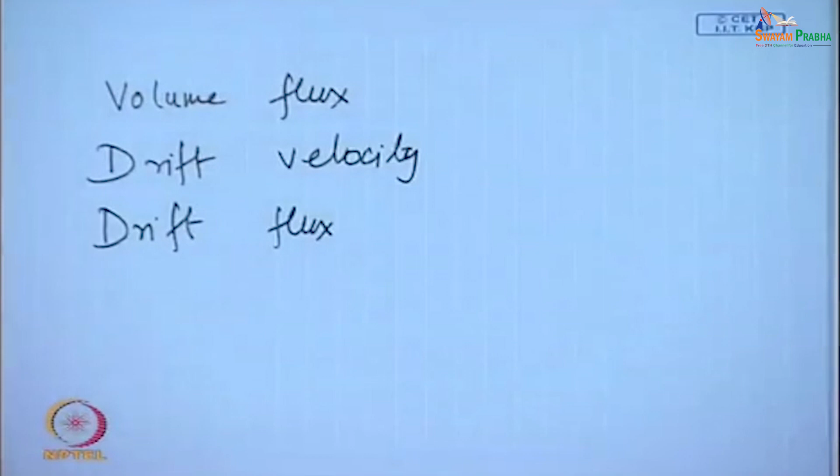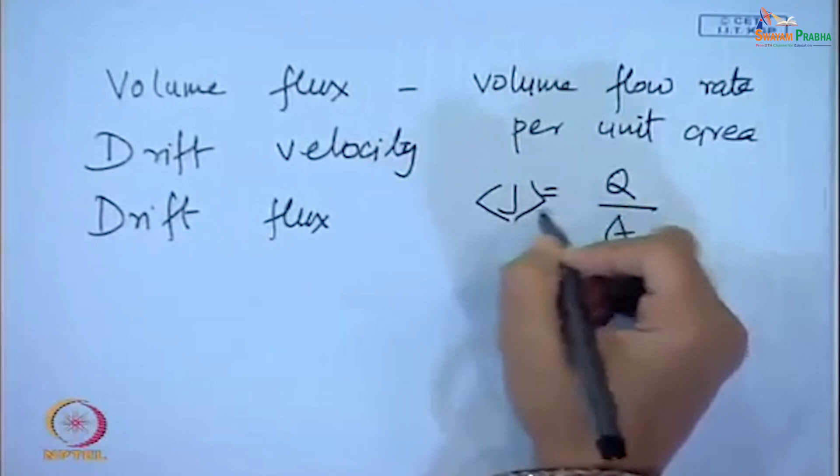Now as far as the volume flux is concerned, as we have already defined, it is simply the volume flow rate per unit area. This I have already told you, and this is J equals to Q by A. Usually it is the average J that we find, and for two phase flow situations...

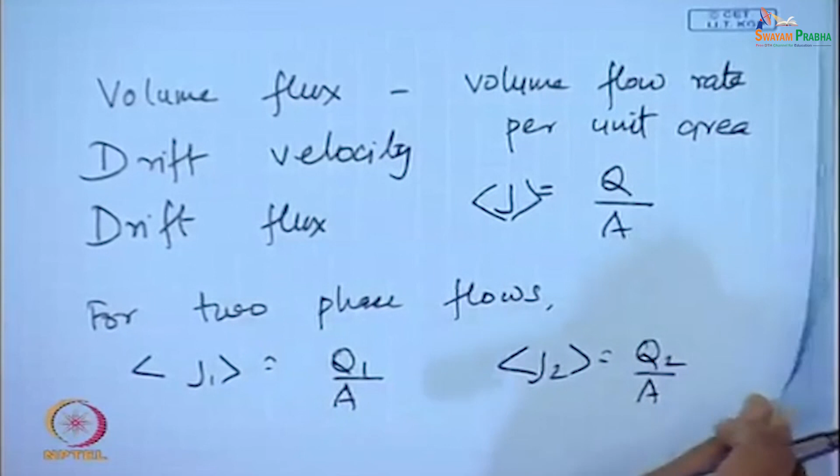Naturally for everything we have to give certain subscripts. So it is J1 which is equal to Q1 by A, J2 equals to Q2 by A. Now all these things denote the average volumetric flux. When there is no variation across the cross section, then naturally the local flux and the average flux are the same.

So under normal circumstances we are not going to put these brackets every time. It is implied that we are speaking about the average fluxes, and since we will be dealing mostly with one dimensional flow situations, our local fluxes and average fluxes are going to be the same thing. Whenever we put those brackets, just like in single phase flow situations, they usually denote the cross sectional average values, and usually we omit them.

And there are certain other things. For example, how are these component fluxes related to the local component concentration as well as the local velocity? That means local component concentration, alpha, and local velocity, u. How are J1, J2 related to alpha and u1, u2?

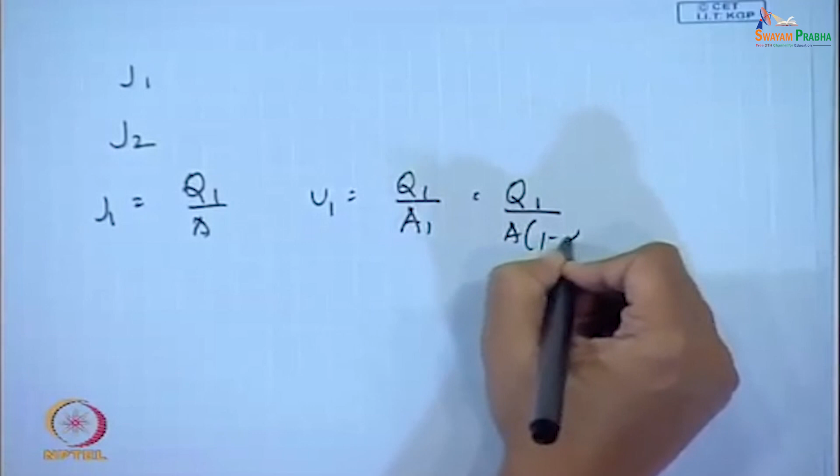So therefore, just from the definition you can know that since J1 is nothing but Q1 by A, and u1 is nothing but Q1 by A1, which is in other words Q1 by A into 1 minus alpha. So from here we know very well that J1 is nothing but 1 minus alpha into u1, and J2 is alpha into u2.

And how are they related to beta instead of alpha? Any idea how it is related to beta? Please come prepared with the nomenclatures, otherwise it is going to be difficult. It is J into 1 minus beta, and this is equal to J beta, isn't it? It is just the inlet flux.

Or in other words, suppose I would like to relate the mass flux and the volume flux. So how are these two related? We know this is nothing but equal to G into 1 minus x by rho 1, because Q1 is nothing but W1 by rho 1, which is nothing but G1 A by rho 1, or in other words G into 1 minus x by rho 1. And therefore J1 is nothing but Q1 by A, so this is going to be G into 1 minus x by rho 1.

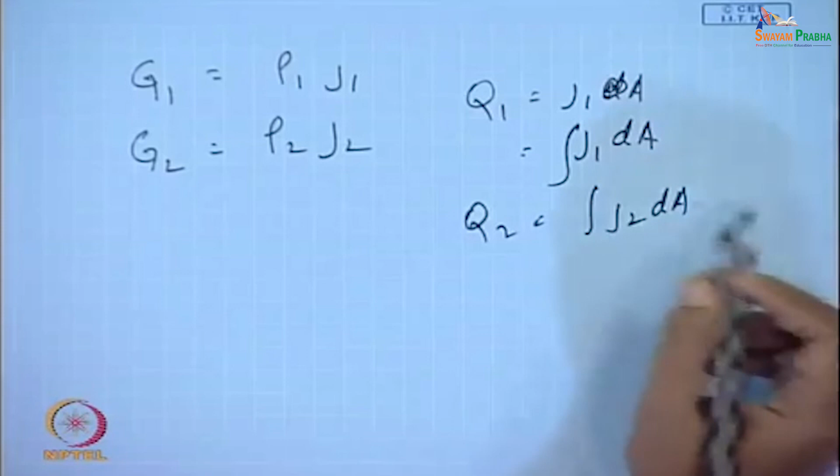into A, but the accurate expression is going to be something of this sort when there is a cross sectional variation of the void fraction, for Q2. Naturally, in the same way we can write it in this particular manner. When J1, J2 vary across the cross section, we can write it in this particular way. So these are the relationships which relate your component mass fluxes and the component volumetric fluxes.

Whenever you are given any particular derivation, please start from the basic definitions and then start deriving. It is going to be easier for you. And as far as I am concerned, if you just start midway and then do something, some marks will be deducted. That you keep in mind.

So, in the similar way, suppose we would like to relate J1 by J2 with the slip ratio or the slip velocity, whatever it is. So this is nothing but equal to Q1 by Q2, agreed, and this is again nothing but Q1, as I have already written down here. Here I have written down Q1, it can be

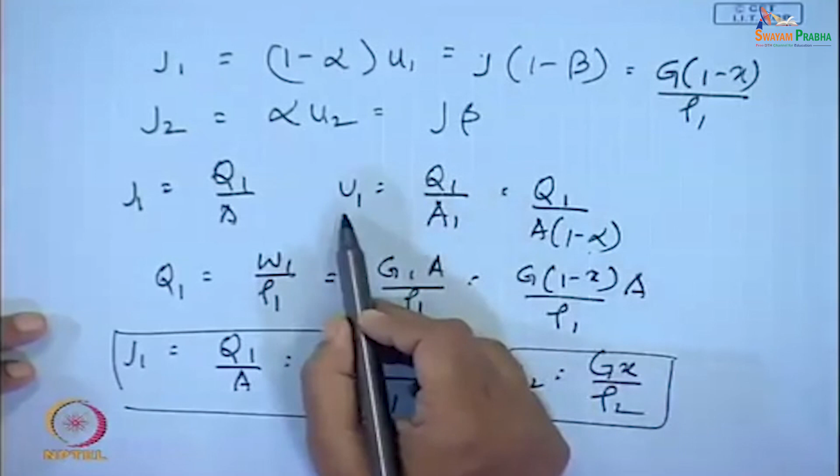written down as A into 1 minus alpha into U1. So if we write it down in this particular manner and we substitute it, then we know that this is equal to U1 by U2 into 1 minus alpha by alpha, is it not? So therefore, in this particular way, or in other words, this is simply K into 1 minus alpha by alpha, where K is the slip ratio.

Why we are trying to connect all these things? Because this is a measurable parameter. So therefore, if we can connect, then if data are available on alpha, we can find out K, or vice versa. Now this was about the volume flux.

Volume flux also probably you have heard. Two other terms, they come up just because of the different velocities the two phases have. Now these two are the drift velocity and the drift flux. Now the drift velocity, if you take it up, it is nothing but equal to the component velocity minus the average velocity.

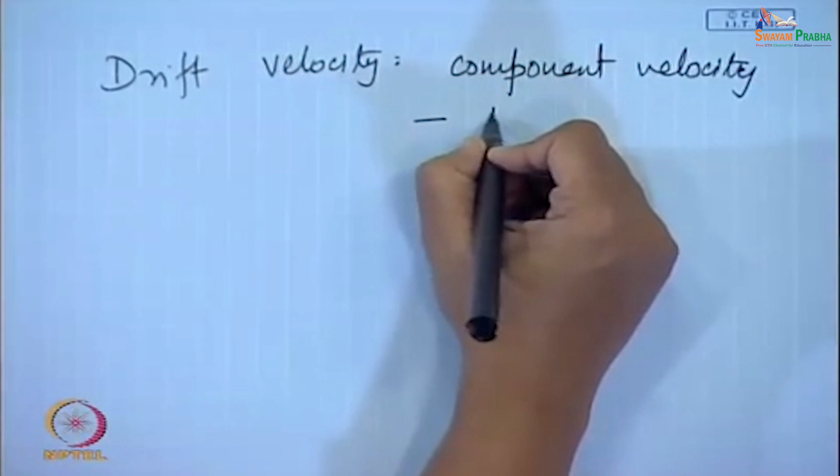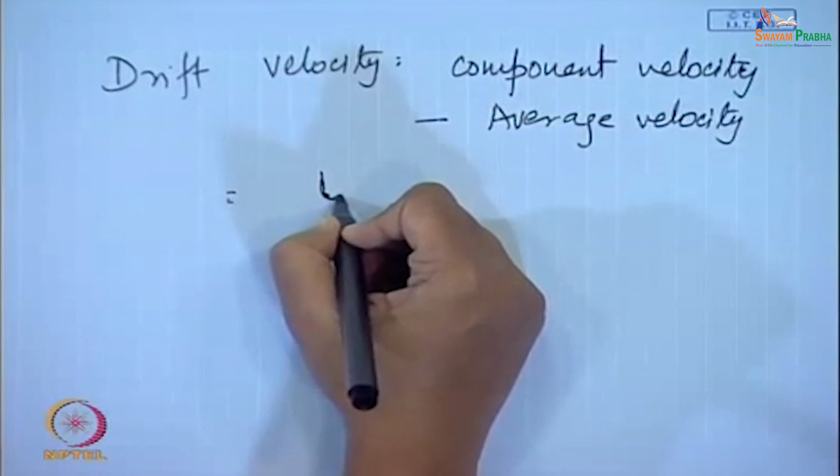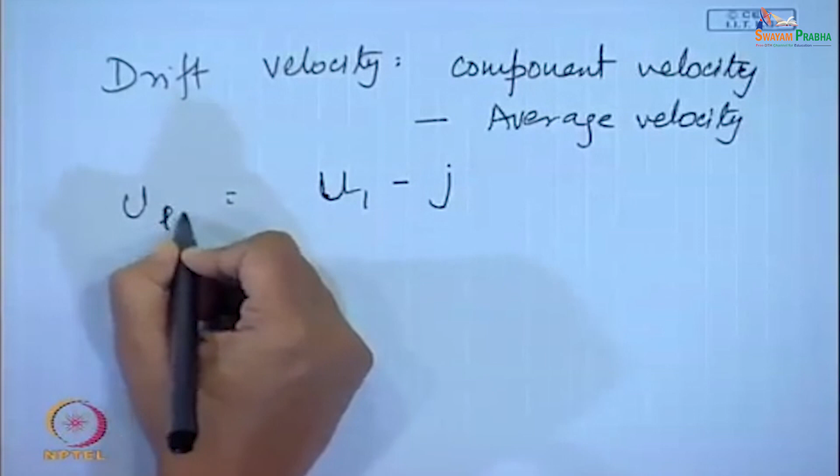So what is the component velocity? How do we denote the component velocity? What is the nomenclature that I have used for the component velocity? u1, and the average is nothing but equal to j. So the drift velocity, it can be defined as u1j, this is equal to u1 minus j, u2j, this is equal to u2 minus j.

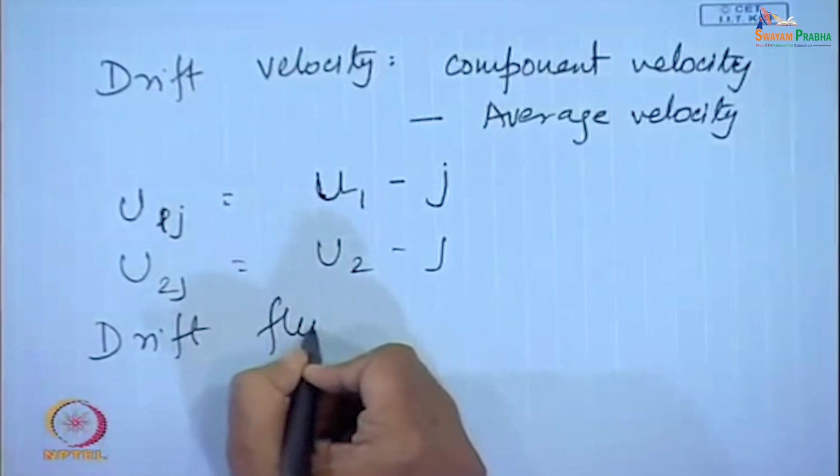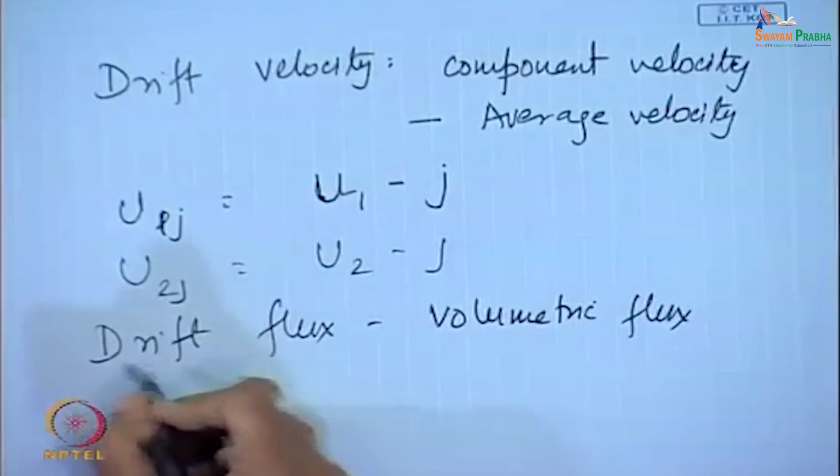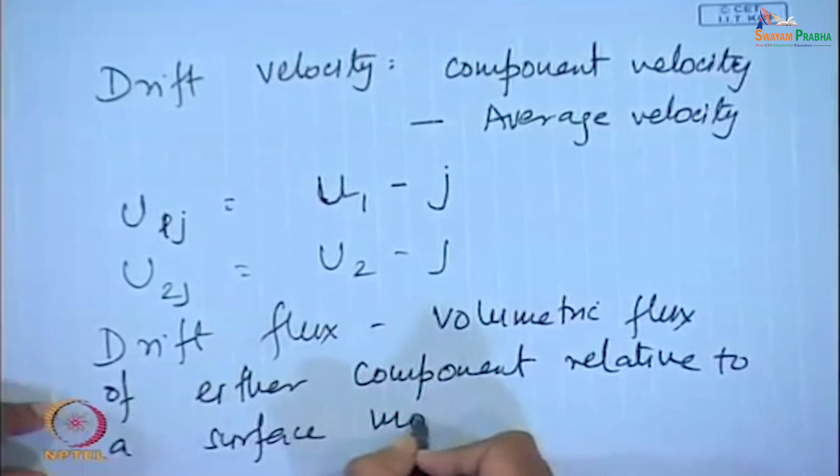Now next comes the drift flux. Now the definition of drift flux, this is the volumetric flux of either component. These definitions you will get in Wallis or Collier, any particular book, you are going to get these definitions. Volumetric flux of either component relative to a surface moving at volumetric average velocity. This is the actual definition.

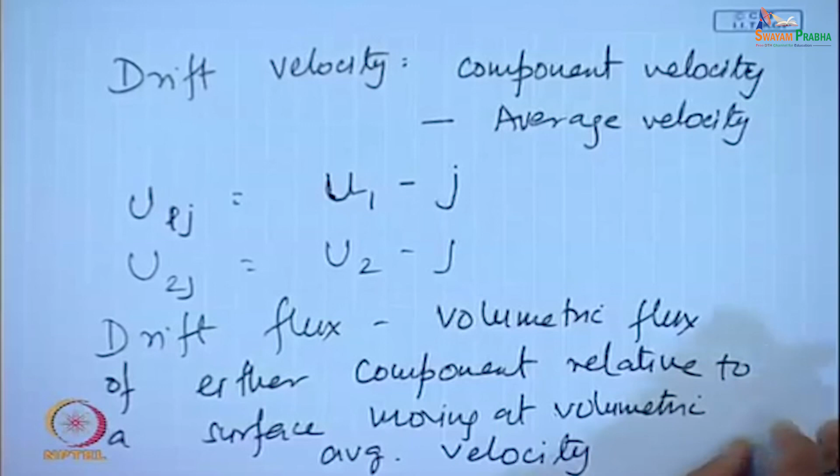So mathematically how we can define this? This can be defined, is usually taken as J21, and this is, as I have told you, volumetric flux of either of the component. What is the volumetric flux of either of the component? Say it is alpha into u2 minus alpha into j. So therefore it is alpha into u2 minus j. This is J21, and J12 equals to 1 minus alpha into u1 minus j.

So these three are the definitions which I wanted to say. Volume flux I have already told you, and after that it is the drift velocity, which is nothing but the component velocity minus the average velocity, and then is the drift flux, which we have defined as the volumetric flux of either component relative to a surface moving at the average velocity. Now remember one thing, this drift flux is very important. In fact, we will be developing a drift flux model using this particular concept.

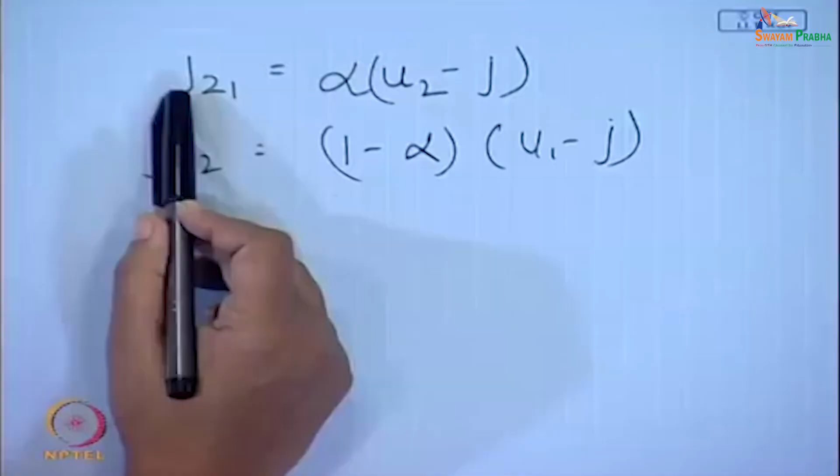Okay, so therefore it is quite important. This drift flux arises just because the two fluids are flowing at different velocities. All these relative things - the slip ratio, the relative velocity, the drift flux, the drift velocity - everything arises just because the two phases are at different velocities. So we would like to derive expressions relating the drift flux and the relative velocity, and also see what is the relationship between J21 and J12.

Why? Because for relative velocity we know u21 equals minus u12. Similarly, what is the relationship between these two? And how is J21 related, because J21 arises as a result of relative velocity. So how is J21 related to u21? This is what we would like to find out. Let us start from the basic definition and see how we can do it.

J21, as I have already defined, is alpha into u2 minus j. We can write it down as alpha u2 minus alpha j. This j is nothing but j1 plus j2. So this can be written as alpha u2 minus alpha j1 minus alpha j2, or in other words, minus alpha j, where j is j1 plus j2, accordingly written in this fashion.

This can be written down, in other words, with alpha u2 as alpha into j2 by alpha, minus alpha j1 minus alpha j2. So therefore we can write it down - let me repeat the expression once more - J21 was equal to j2 minus alpha j1 minus alpha j2, or in other words, this is j2 into 1 minus alpha, minus alpha j1. This is the relationship between the drift flux and the component volumetric fluxes.

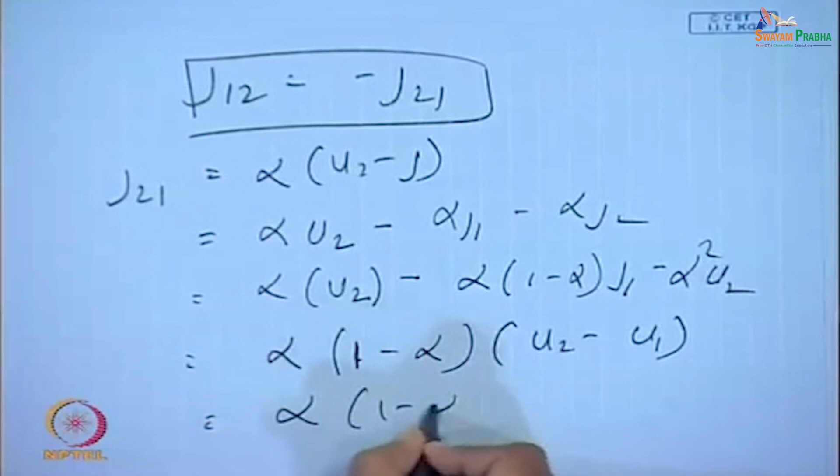So for this case, we can write it down as alpha u2 minus alpha j1, same thing that we had done previously. Or in other words, this can be written as alpha u2, expressing j1 in terms of alpha, it is alpha into 1 minus alpha j1 minus alpha square u2. Or in other words, we can write it as alpha into 1 minus alpha, u2 minus u1. Or in other words, we can write it down as alpha into 1 minus alpha, u21.

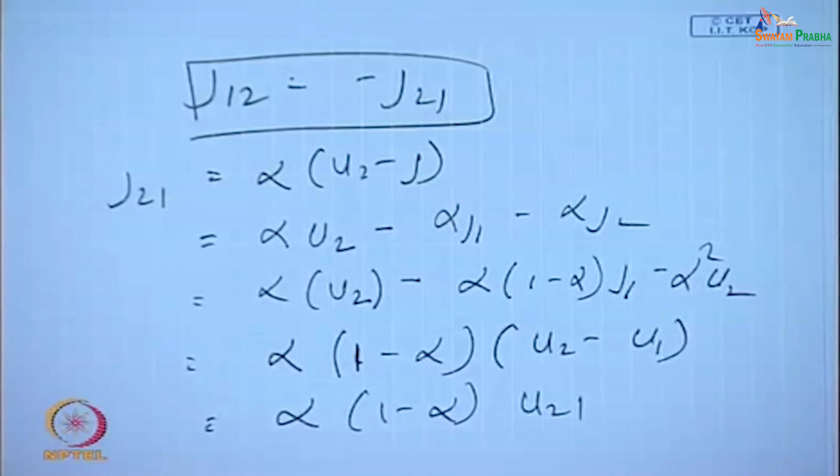Understood? Where u21 is nothing but the relative velocity of phase 2 with respect to phase 1. So from this particular expression, what do we get? We get j21 is proportional to u21, or in words, drift flux is proportional to relative velocity for a particular system under a particular condition, assuming alpha to be constant. So this is proportional to relative velocity.

So this thing has to be kept in mind. Drift flux, drift velocity we will be dealing with in greater detail when we do the drift flux model, but this completes the chapter of nomenclature. We had defined the set of nomenclatures. I would request you to revise the entire thing before we proceed further.

Initially, I tried to explain to you what is two phase flow, why you have opted for this subject, and why you should study it. Next, we found that the basic difference between single phase and two phase flow arises because the two phases have a wide variety of distributions. So unless we understand the distributions, we cannot do much about it.

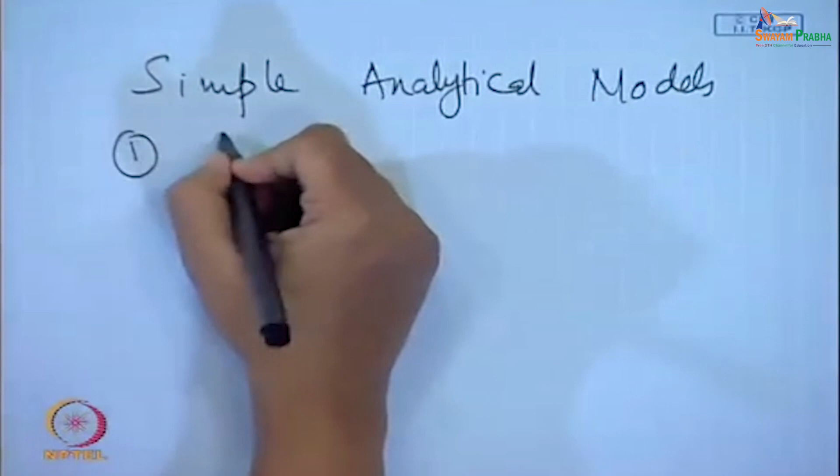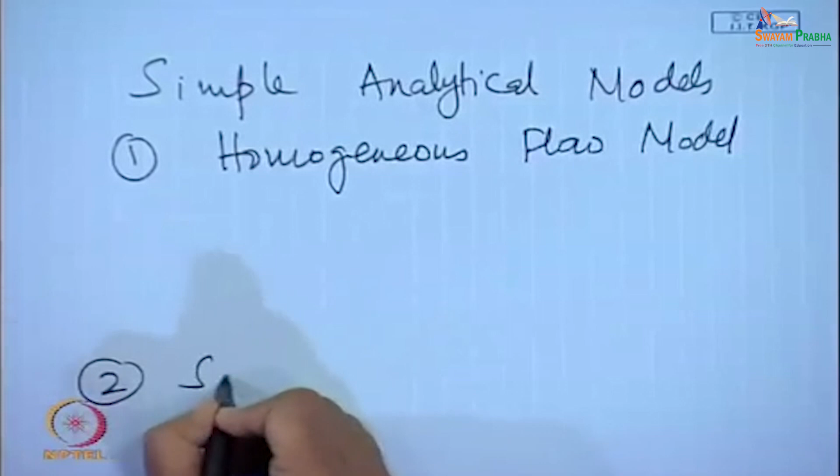Under the simple analytical models, there are different distributions we can assume: the two phases intimately mixed, or totally separated, interacting just at the interface. These are the two extremes that we can assume. Accordingly, the simple analytical models include, one, the homogeneous flow model, and the other extreme, the separated flow model.

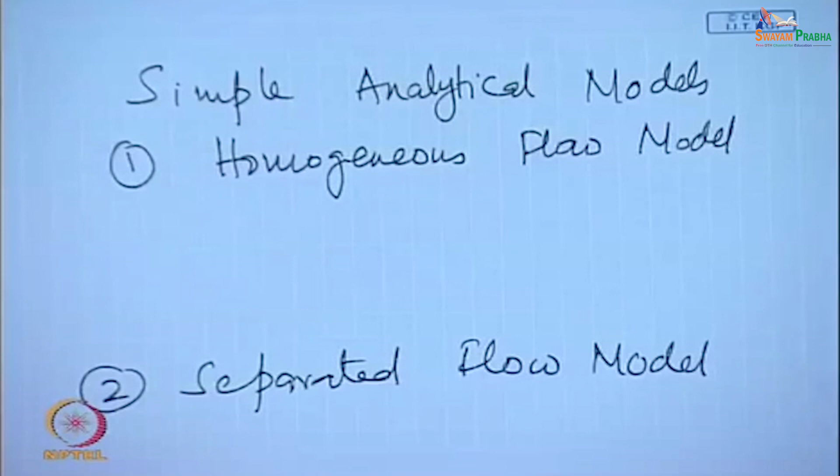In the homogeneous flow model, we assume that the components are intimately mixed, so that none of them can manifest their properties separately, and therefore the entire hydrodynamics can be predicted by suitable average properties. Under certain circumstances this can be very accurate. We will be dealing with these simple analytical models in much greater detail, and you can well understand that when it is a completely dispersed flow, the homogeneous flow model can give accurate results.

Unless we have very high phase velocities, or at least one phase has a very high velocity, there will always be a slip comparable to the mixture velocity. The first assumption when we say the two phases flow as a pseudo fluid is that they flow at the same velocity. The moment velocities become different, they start manifesting individual characteristics. But under practical applications, this happens under very few circumstances; for most cases there has to be relative motion between the two phases. So to improve the predictions of the homogeneous flow model, we have to incorporate the effect of relative velocity and modify its expressions.

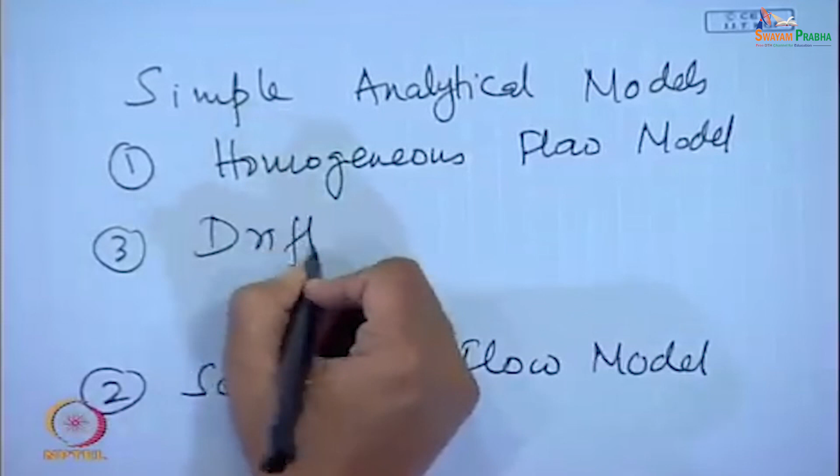Now, for that, what can we do? We incorporate the effect of relative motion by the concept of drift flux. Therefore, the improvement of the homogeneous flow model is the drift flux model, which incorporates the relative motion between the two phases. This is usually achieved by introducing the concept of drift flux, which we will discuss separately in greater detail.

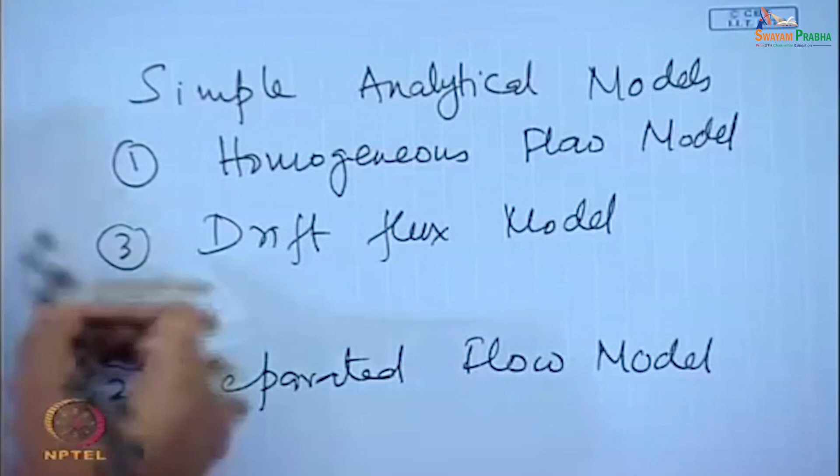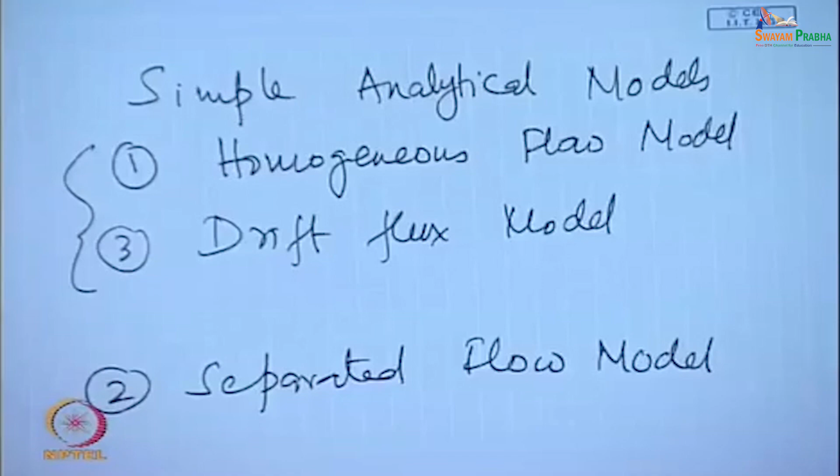So these two models are generally used for mixed flow and dispersed flow. If you remember the classification of flow patterns from my earlier discussion, at one extreme there was dispersed flow, at the other extreme separated flow, and in the middle a range of mixed flow.

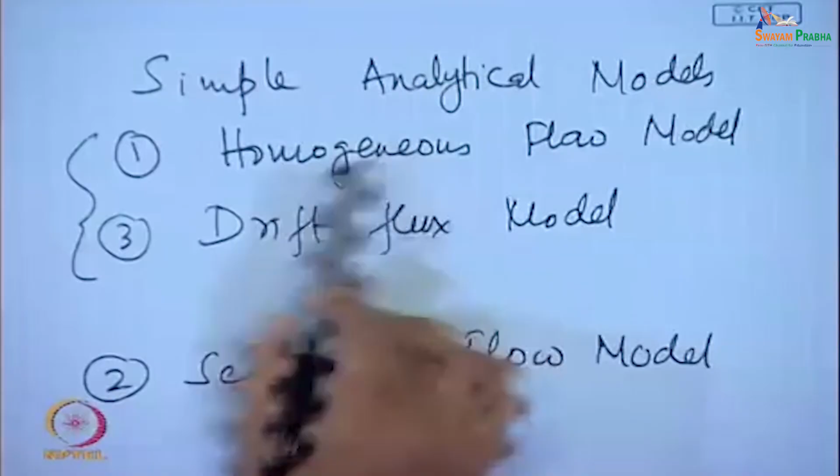For dispersed flow, at very high phase velocities, we use the homogeneous flow model. But as phase velocities get lower, slip comes in, and gradually even in dispersed flow relative motion has to be included. When we enter the mixed flow regime, incorporating the drift flux model often gives a much better prediction compared to the homogeneous flow model, even without considering the exact distribution. Just using the drift flux model, predictions improve drastically. So the drift flux model has greater applicability and is a very useful concept for many occasions.

At the other extreme we have stratified flow and annular flow, where the two phases do not mix at all. If you use the homogeneous flow model for these, you won't get good results—that's an expected situation.

For this case we have the separated flow model. Here, we write separate continuity, momentum, and energy equations for the two phases, taking into account that they interact at the interface. If we don't consider these interactions, we're just considering single phase flow of either phase, and those equations won't be accurate.

So for very accurate or reasonably accurate results, we are supposed to write the equations of continuity, momentum, and energy for the two phases, and incorporate the interphasic interactions between them using suitable constitutive relationships.

So these are the three simple analytical models. We will deal with all three in great detail, one by one, and you will understand more about how two phase flow characteristics are incorporated into single phase flow equations to develop accurate prediction results for the hydrodynamics. We will mainly cover hydrodynamics, and if time permits, also heat transfer characteristics.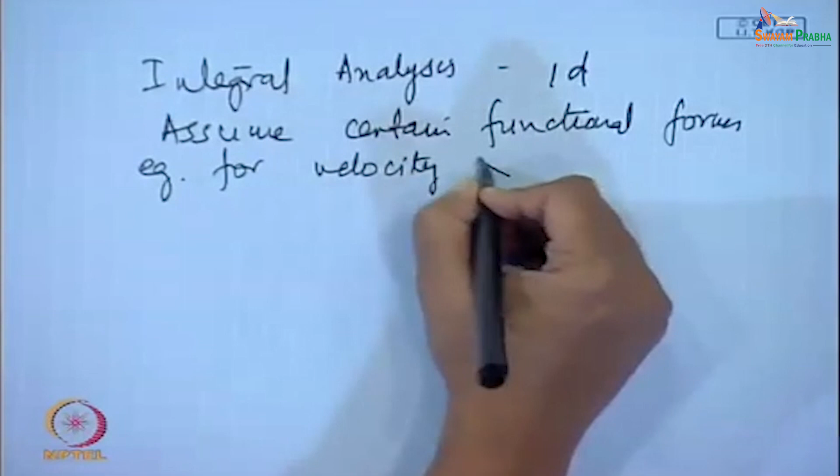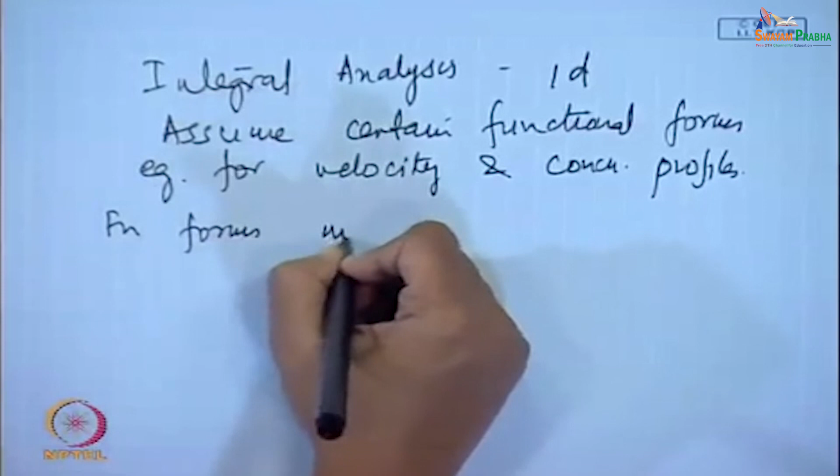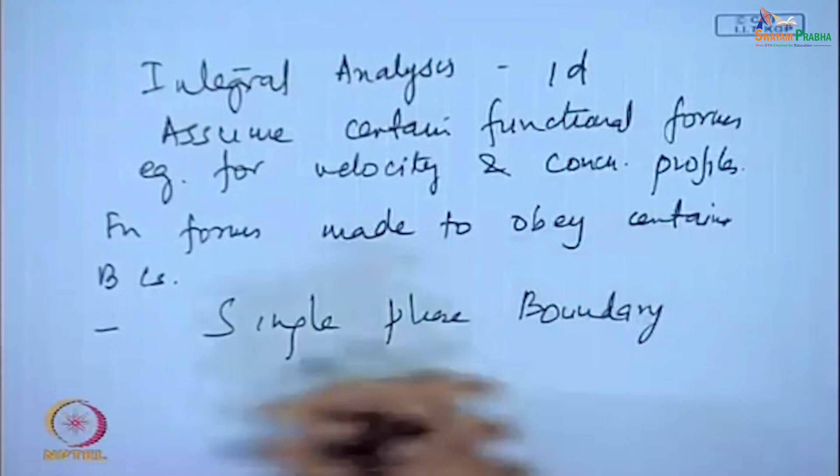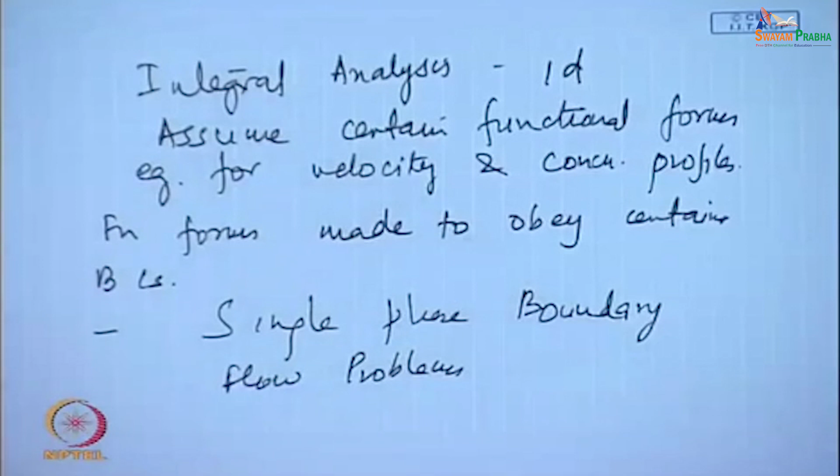Certain functional forms, for example for velocity and concentration profiles, these functional forms are made to obey certain boundary conditions. Accordingly they are integrated and we get the total thing. This is used quite frequently in single phase flow analysis, for single phase boundary flow problems, where we assume a parabolic profile or certain forms for velocity, and after that we integrate, assuming r equals 0, u equals 0, r equals capital R, u equals u max or something. We integrate it and finally get the velocity profile. The same thing happens here also.

For more accurate analysis, what do we do? After integral analysis, we go for differential analysis. We have noted it down in the form of increasing amount of complexities. In differential analysis, again the same thing we do.

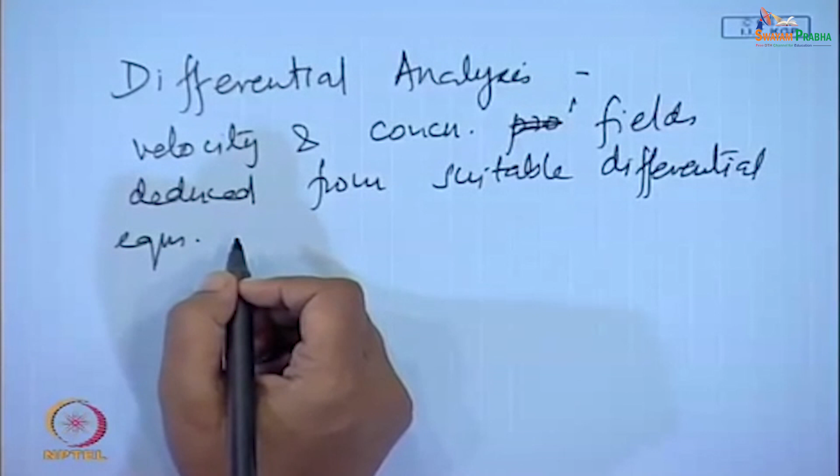Velocity and concentration fields are deduced from suitable differential equations. These suitable differential equations, we assume that they follow one dimensional flow idealization. They are written for time averaged quantities usually. Sometimes more sophisticated theories may even consider temporal variations. This we encounter in single phase theories of turbulence, in this differential analysis.

So therefore we find that this differential analysis, velocity, usually it is one dimensional. Both integral and differential analysis we usually use for one dimensional analysis.

Integral analysis is performed for two phase flow situations just like it is performed for single phase flow situations, by assuming certain functional forms which describe the velocity or concentration profiles. These functions are made to satisfy certain boundary conditions and then they are integrated and we get the entire profile, just as has been done for single phase boundary flow problems.

Differential analysis is slightly more complex and more accurate. We assume the velocity and concentration fields which are deduced from suitable differential equations, and then usually we assume time averaged quantities, but temporal variations can also be considered for more sophisticated theories. If we draw an analogy, we use this for single phase theories of turbulence.

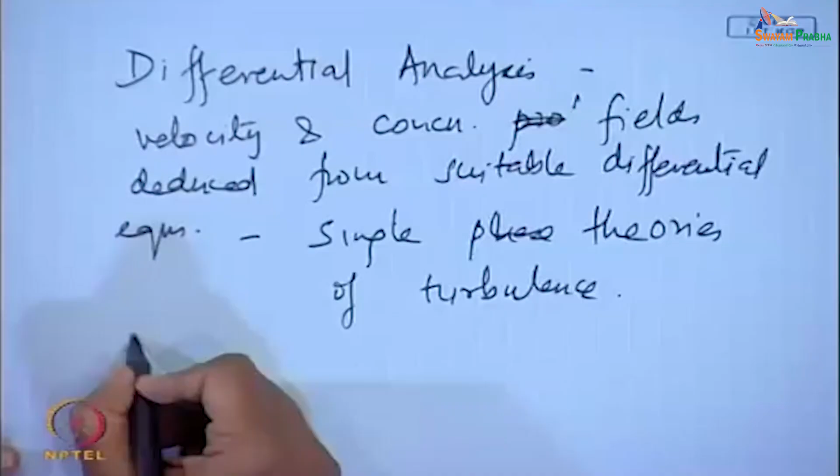The next thing which I forgot to mention here is the flow regime based models. So far whatever we were discussing, we were not considering the exact topology of distribution, empirical correlation, we were not considering anything. In homogeneous flow theory, we assume that the phases are intimately mixed. In integral analysis and differential analysis, we are not exactly considering how the two phases are distributed.

So the next approach, which I forgot to mention in my slide, is the flow regime based models. Here, we consider the exact flow distribution, how the two phases are distributed. Accordingly, seeing the flow distribution, we write the conservation equations - equations of continuity, momentum, energy, etc. Then we solve them. Depending upon the topology, we decide the boundary conditions, apply them, and try to solve them. So this is a much more logical approach.

Now remember one thing, usually what is our approach? Just like single phase flow theory, we would like to take up a more or less simplified thing, maybe simple analytical models. Then, using more complex theories, we would like to introduce suitable correction factors or modifications to that theory, so that the predictions are improved. Now these correction factors, these modifications, can be obtained empirically as well, if we really do not know the physics of how to incorporate them.

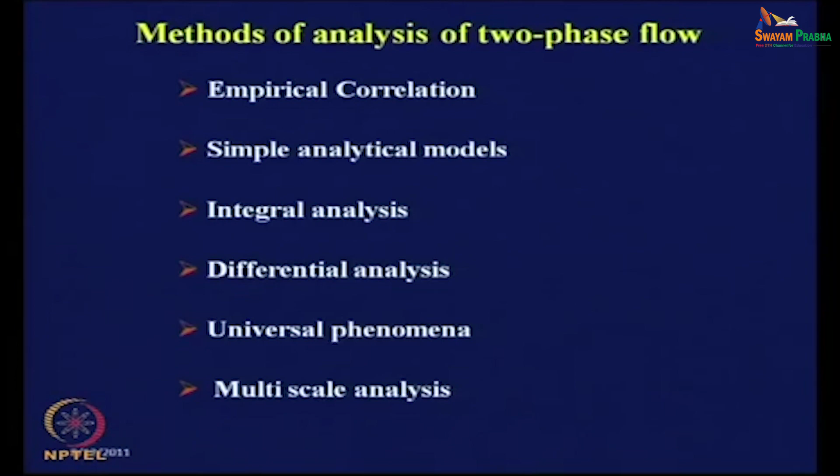I have mentioned one more thing, the universal phenomena. This is a class of very powerful techniques which is based on universal phenomena that are independent of flow regime, analytical model, or the particular system. Typical examples may be the various theories of wave motion, or the extremum techniques for obtaining the locus of limiting behavior of a system, and so on. We generally shall not be dealing with this much in our present course.

With this particular thing I am going to end the basic introduction to two-phase flow. Whatever I had as an introduction to two-phase flow, that I am going to end, and we are going to start simple analytical models. We will be starting with the homogeneous flow theory, and then gradually we will be going to the drift flux model.

Before that, one thing I would like to do. I had told you I had forgotten to derive the energy equation. I had derived the single phase equation of motion, the momentum equation, isn't it? Energy equation is very simple. Tell me, when a fluid is flowing through a pipe, say water is flowing through the pipe, what are the different energy terms that we should be considering there? Before I end the class and start the homogeneous flow theory, I would just like to derive it in one or two lines.

Very true, it has to have, otherwise it cannot move. Potential energy, it must have a position of its own. Then since it is flowing, pressure energy has to be there, very correct. Then internal energy has to be there, and if there is some amount of heat input, usually work done is 0. So therefore we can write down the energy equation in this particular way.

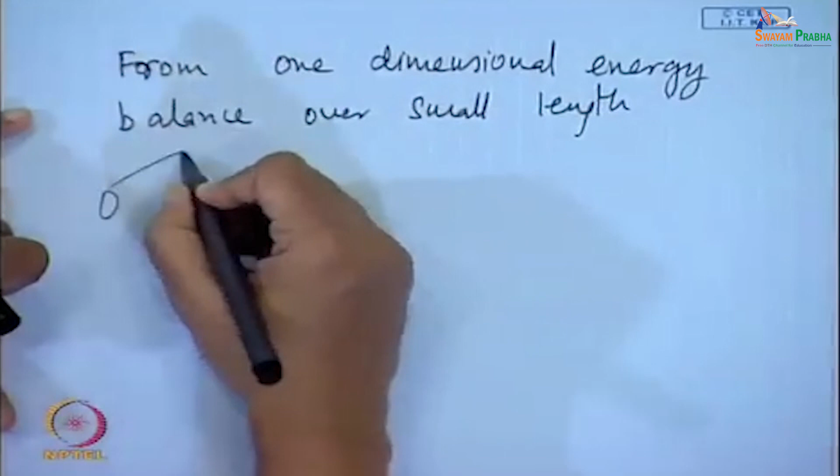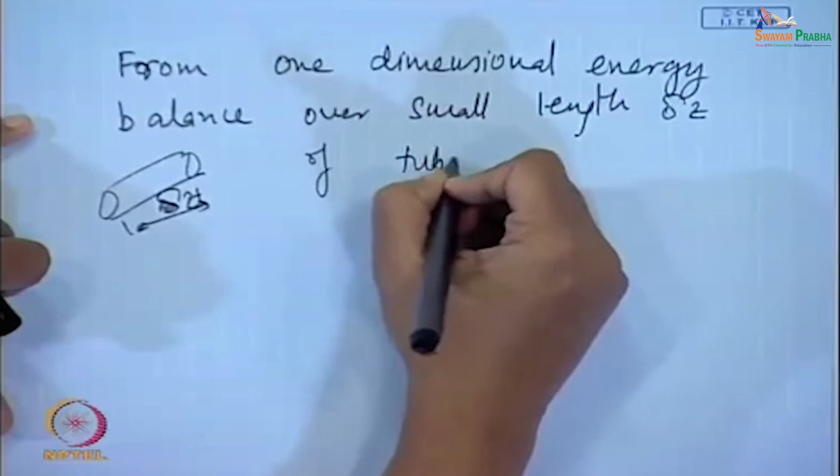Say, from one dimensional energy balance, over a small length delta z, just like we had done before. That same figure, if you remember, we had taken a delta z of tube. This same thing we are going to do, delta z of tube. So what are the different types of energy we have?

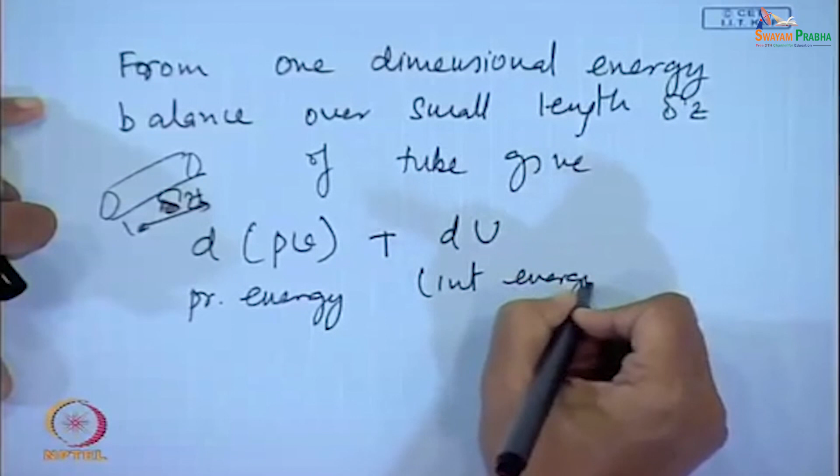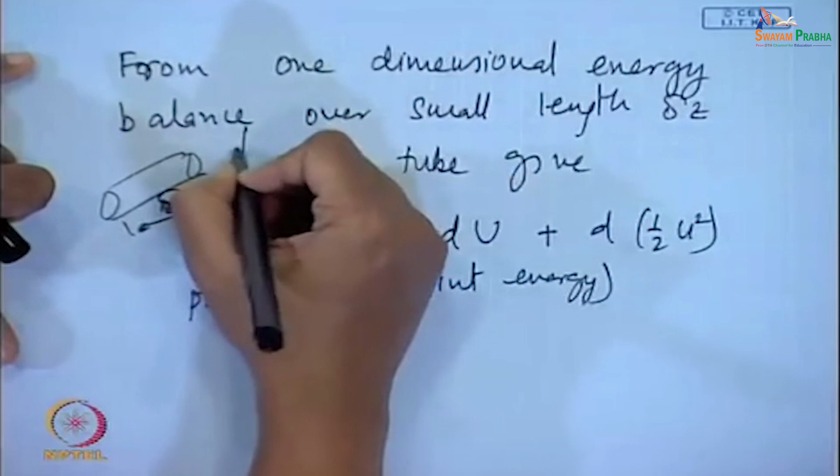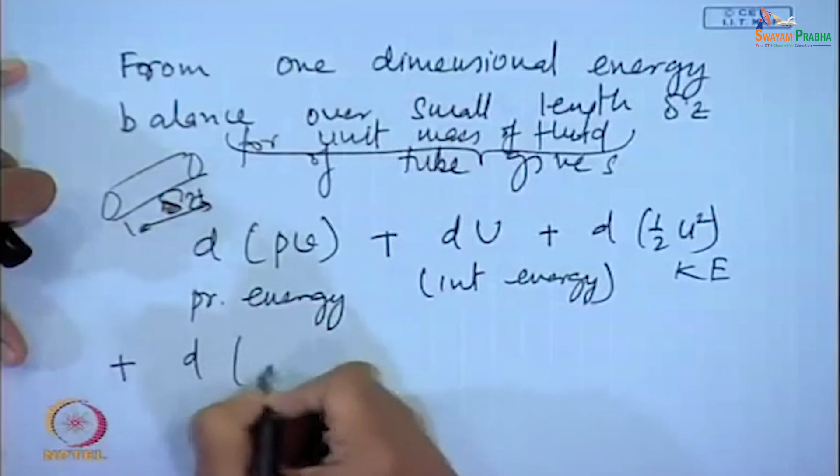PV, this is the pressure energy, plus internal energy. This is for unit mass of the fluid that I am doing, for one dimensional energy balance over small length delta z for unit mass of fluid. Of tube, this should be here. For unit mass of fluid, this gives this term: internal energy, then this is nothing but kinetic energy, and we have the potential energy. This is equal to dq minus...

Remember, capital Q is volume flow rate, this is small q. So this is the heat added, this is the work done. We never use it, just to denote it I have given a small w, because capital W is mass flow rate, but for most of the cases this is equal to 0. Just to note one thing, all these d's I have written just d, and these d's are marked with dash.

Those who have done my thermodynamics class would have understood that I am very fussy about differentiating between inexact and exact differentials. So, therefore, just note this thing.

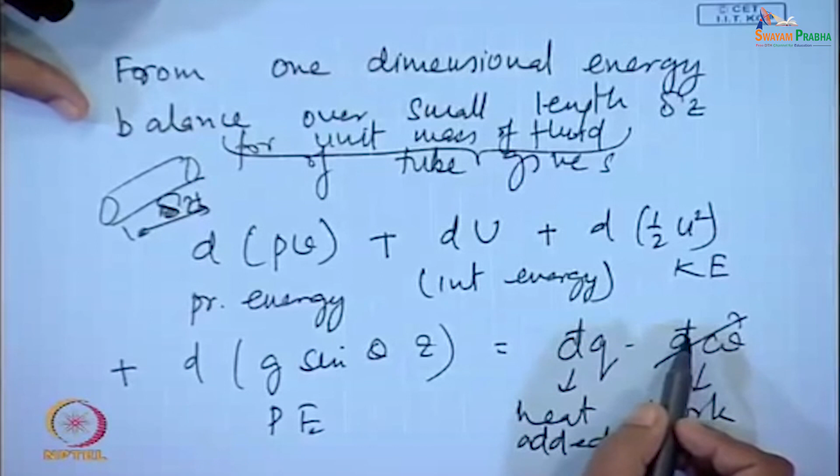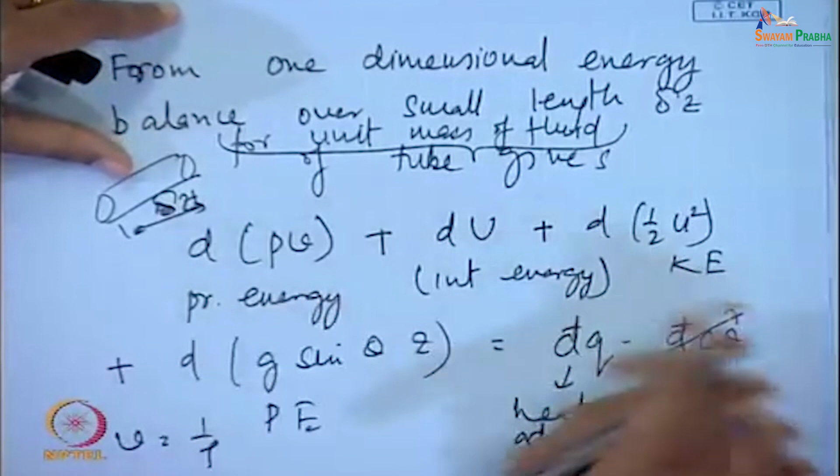This V, as you know, is nothing but equal to 1 by rho. So, therefore, this is the total energy balance equation which you can write down for a single phase flow situation. Now, here we know what is this du equal to, the internal energy.

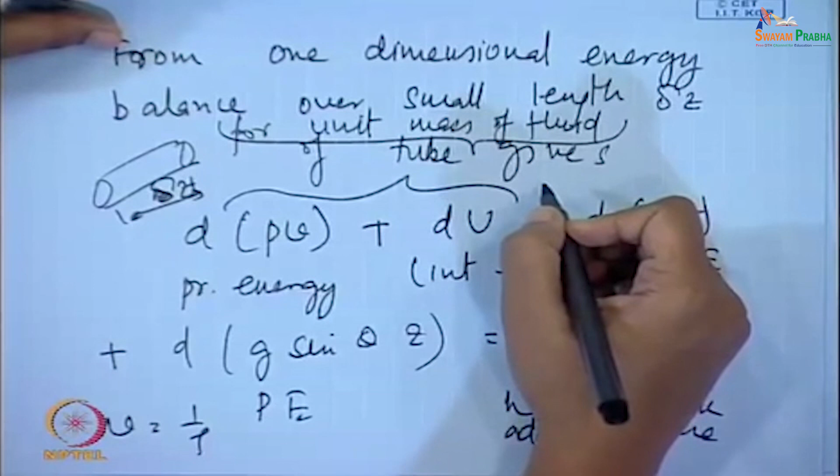We can do two things. One is we can combine these and write it down as du plus d(pv) as dh. The other thing is we can also express du as dq plus df minus pdv, where this df arises from irreversible friction losses. So, therefore, these three are the components of du.

Now, if we substitute this particular equation in the basic energy balance equation, then what do we get? Instead of du, we write dq plus df minus pdv, plus d of half u square, plus dg sin theta z equals to dq.

These cancel out. This can be written down as v dp plus p dv, so these also cancel out, and finally what we get is an expression: v dp plus u du plus g sin theta dz plus df equal to 0.